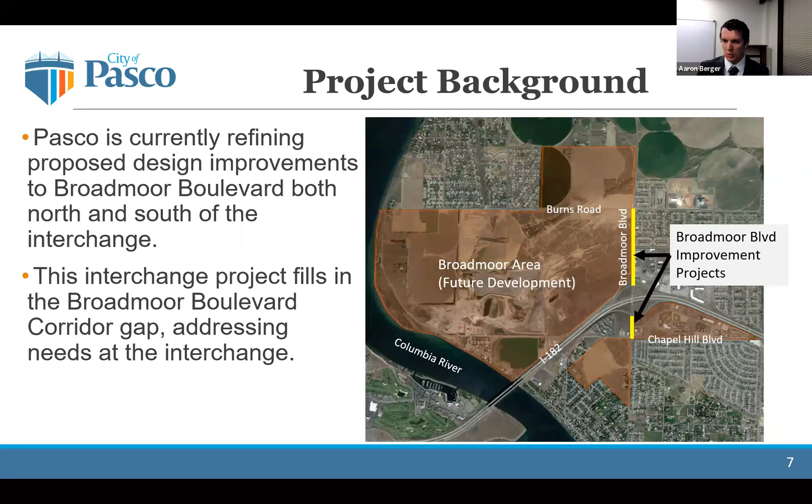As we talked about last time, there are three key categories of concern we've noticed at this interchange, based both on feedback from the public and analysis from our technical team and field observations. The first category is motor vehicle safety. We've seen a history of crashes on I-182 near the eastbound exit ramp to Broadmoor, and also high crash incidents on Broadmoor Boulevard through the interchange.

From a traffic congestion standpoint, our second key issue, we've seen problems with queuing on the eastbound off-ramp and also slowing on I-182 approaching the off-ramp. While those two issues are related, they also have different causes from time to time - some is just due to so many people trying to exit the freeway, while other parts are due to problems up at the signal.

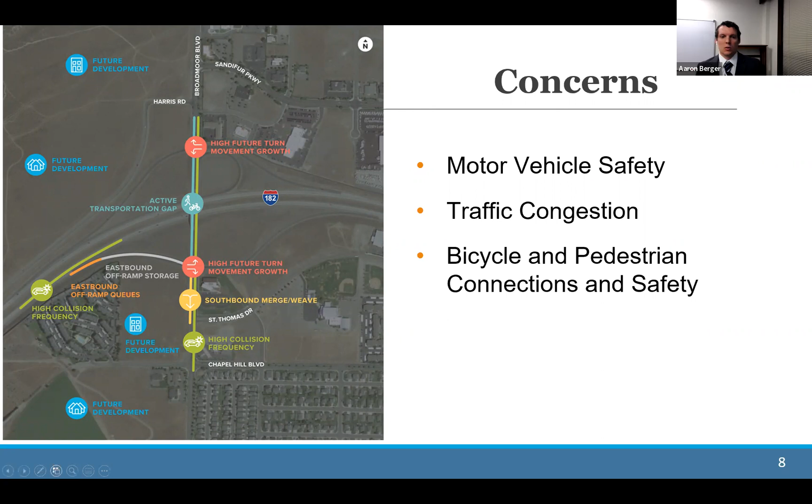The other issue we're seeing is bicycle and pedestrian connectivity and safety throughout the interchange. Right now, there's not much facility for bicycles or pedestrians to get through. We saw that a lot in the public comments - people noted it's really hard to get through this interchange, and they won't let their children walk through it. As somebody who's been out there in the field several times, I can attest it's definitely not a comfortable place to walk through. That's the other key concern we're looking at addressing with this project.

So talking about timeline, we talked about this a little bit last time. We had our first workshop back in December. We talked about the project background and purpose and solicited feedback from the public on the concerns and needs you've seen out there. We also got input on potential alternatives. Taking all that information, we moved into alternatives development, doing work sessions with our technical advisory team, our TAC, towards the end of January into early February. Moving forward from there, we got to where we are today, where we have a set of alternatives that we're advancing into analysis.

And this is an opportunity to present these alternatives that we're moving forward into evaluation to the public and solicit feedback. Get your thoughts on the direction of these alternatives and the things you like and the things you'd like to see enhanced or changed.

Looking further ahead, we're aiming to get WSDOT and FHWA approval of a preferred alternative later in the spring, along with the environmental approval of a preferred alternative, and then begin the design phase of this work. At that point, we will make the final report available to the public, which will include the details of the preferred alternative that is selected, and then move forward into project bid out, depending on the size of the project. We could potentially go to bid sometime in the late fall.

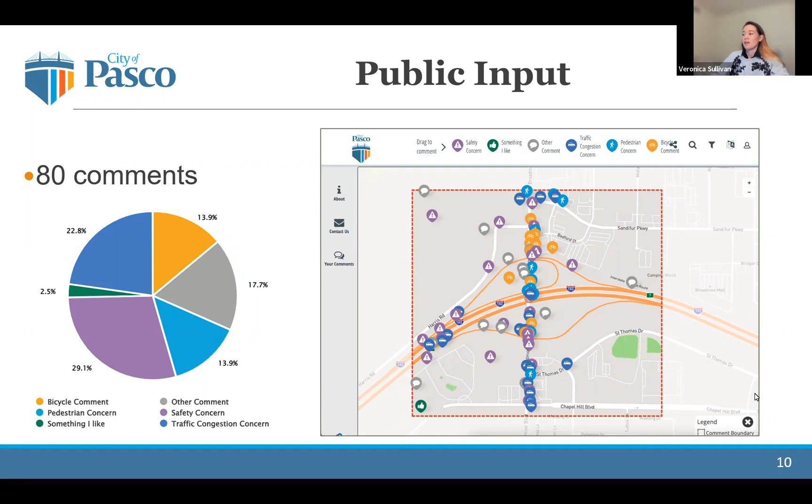As Aaron described, back in December we did our first workshop, and thank you to all the people that provided public input into our social pinpoint site. It was up for 2 months and we received over 80 comments, which is great. There were comments in all variety of areas, bicycle, pedestrian, things they were concerned about, safety or traffic congestion wise. About 29% of the comments were safety concerns, and 14% were bicycle and pedestrian concerns, which is really great news. We used this information to develop some alternatives.

A lot of those comments included different alternatives that were considered for analysis and used for brainstorming purposes. In this case, we were suggested the Diverging Diamond Interchange, the loop ramp, also known as the cloverleaf, and we were given a lot of great ideas for pedestrian alternatives that were also considered in the brainstorming session. We also looked at the extended deceleration lane for the eastbound off-ramp. We looked at a lot of different alternatives, including many provided by the public.

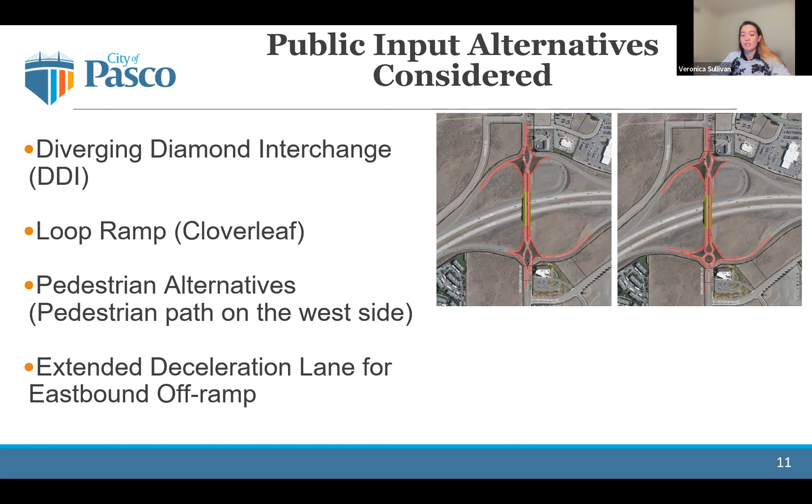We want to say a really great thanks to everyone that provided information and comments on the social pinpoint site. I'll hand it back over to Aaron.

Thank you, Veronica. So I'm going to go over where we're at in this project process. We already went through this at a high level looking at the schedule, but this screening process diagram really shows how we move through this planning process and ultimately get to a preferred solution. In the early stages, when we were brainstorming alternatives, we engaged our advisory group, the technical group, with representatives from the city, from WSDOT, FHWA, from the county, the BFT transit agency, and the BFCOG, the MPO.

We worked with that group to develop and brainstorm alternatives, and we also solicited feedback from you, the public, as Veronica was mentioning. So those alternatives we got through social pinpoint and through discussions at the last work session were also brought into this brainstorming exercise. We started with a wide range of alternatives, all kinds of ideas, but generally aimed towards achieving the project purpose and need, addressing those three key concerns related to safety, motor vehicle congestion, and bicycle and pedestrian connectivity and safety.

Our next step was to refine these alternatives. We grouped them into what we called families of alternatives. There are a lot of different solutions for an interchange like this, and many of those solutions are complementary, meaning you could build both and they wouldn't conflict, since they fix different issues. So it's important that we group things together to make sure we're not eliminating or discouraging alternatives that don't compete with each other.

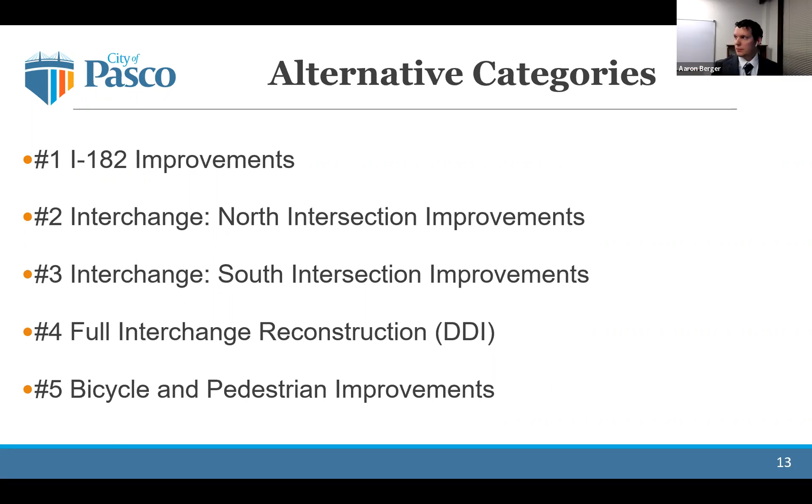We'll start first with our freeway alternatives. As Veronica mentioned earlier, we'll go through these alternatives. I'll present them and give you an overview of the thinking behind them. Then in our Q&A, we'll go through these again and provide you the opportunity to comment.

Focusing first on our freeway alternatives, one alternative we considered is the eastbound loop ramp. There's a little history here. Originally, when this interchange was laid out, it was anticipated that this loop ramp would be added at some time in the future when development and traffic volumes justified it. The purpose of this loop ramp would be to split exit ramp volume between two locations.

Think about all the traffic using the current eastbound exit ramp from I-182, and all the queuing that occurs. A lot of that traffic is making a left turn, and a lot is making a right turn. What this does is keep all the right turn traffic on the existing ramp, while the left turn traffic gets on the loop ramp. This splits the traffic into two different movements, simplifying traffic operations at the eastbound ramp terminal, the south intersection, because we lose our eastbound left turn and replace it with a westbound right turn, which is a much simpler movement to serve from a traffic control perspective.

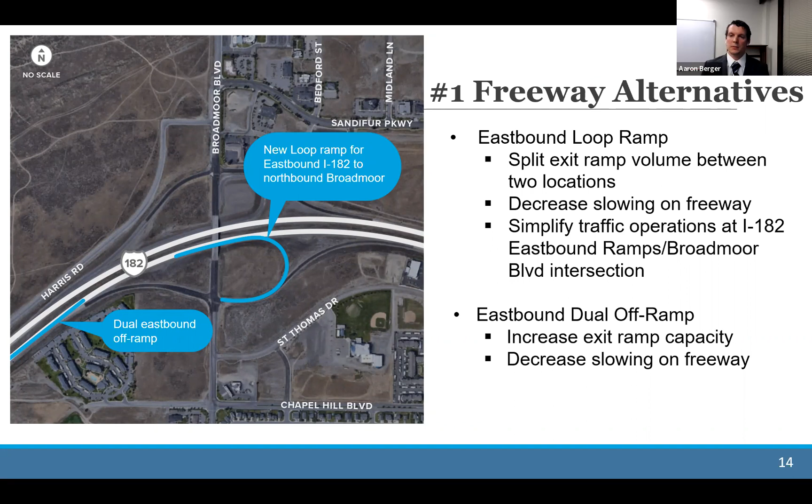Think a little bit about Road 68 right now with the westbound right turn movement at that intersection and how much traffic uses that movement today. As Pasco continues to grow, there will be more demand for that type of movement.

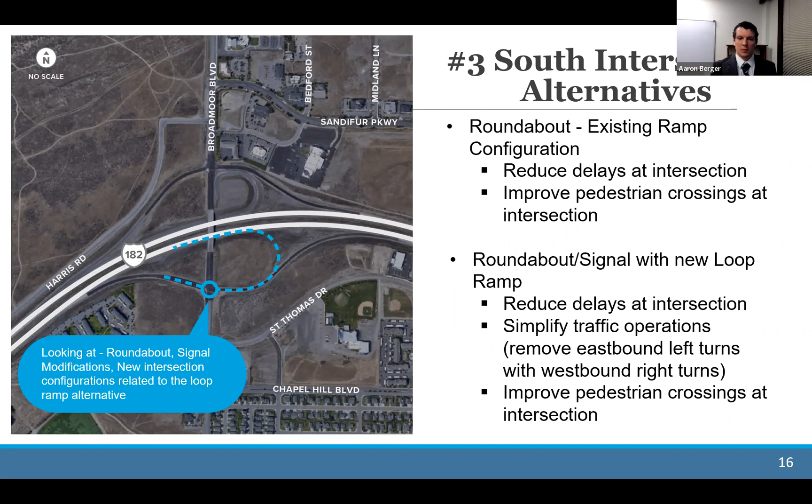And now the fun one. This is a full interchange reconstruction alternative. It's important to point out that there's a lot of potential interchange configurations we could consider, and we did at a high level consider lots of different ones - a single point urban interchange, something with more loop ramps, something with flyovers. But from a feasibility perspective, thinking about the criteria we're working with related to right of way and everything else, and thinking also ahead about what is the best solution long term for this interchange...

We settled on this DDI, and there were comments from the public, also from some of the regional stakeholders in the project with interest in looking at a DDI at this location. So that's what this is, and the version we're looking at is a diverging diamond interchange with roundabouts, which is a little unique from a DDI perspective. DDIs are already a bit of a unique feature, but the overall purpose is to gain some operational, traffic congestion relief from removing left turns and simplifying. I know it doesn't look simpler, but from a traffic management and congestion management perspective, this layout does simplify traffic operations.

So I'm going to run you through how this alternative works from a traffic circulation perspective. It's a little confusing looking at it just as a stick figure. If you're traveling on Broadmoor Boulevard northbound, you can see with the yellow arrows if you want to go on to I-182 eastbound, I-182 westbound, or stay on Broadmoor Boulevard going northbound. This is the unique feature of DDIs where you drive in what we call the contraflow direction across the freeway.

As somebody who's driven through several DDIs and analyzed some in the past, they look a lot more confusing from an aerial view. When you drive them, especially once or twice, it's actually a lot simpler than you'd think. The main reason is there's usually a physical barrier separating the two directions of traffic between the interchange intersections. So that section where you feel like you're driving on the wrong side of the road, you don't actually see the traffic going the other direction - it feels like you're on your own piece of roadway. That's an important thing to remember when you're looking at this.

So here's northbound. Let's take a look at southbound. You can see the same idea circulating through. Notice how we've simplified the conflict points - there's one major conflict in the roundabout, and everything else is really either a free left or a free right turn. Then looking at the ramp terminals, if you're using the eastbound ramp, that's how you process through the interchange, and then looking at the westbound ramp. That's how this configuration would work.

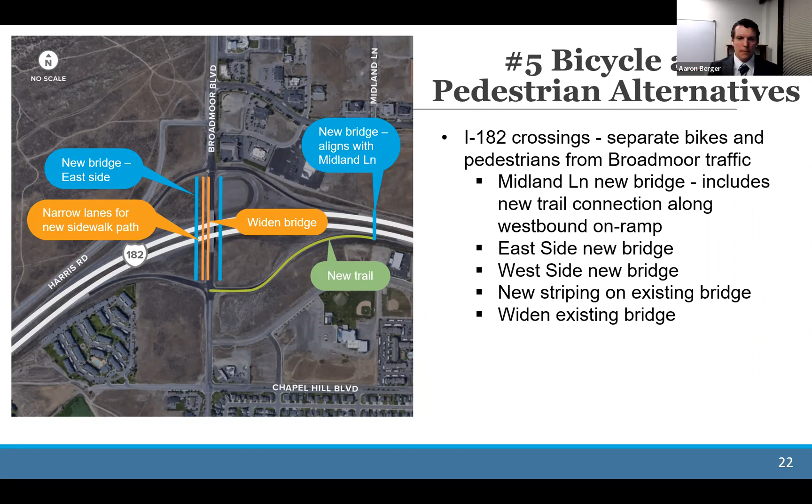Moving on to the on and off ramps, the exit and entrance ramps from 182, we are looking at potential grade separation at these locations for bicycles and pedestrians.

We were considering both over and under crossings, but ultimately based on the grades, the right of way, and also the ADA slopes required to make these work. So think about if you're in a wheelchair and you're trying to get to one of these crossings, we need to maintain a traversable grade. People need to be, it can't be too steep.

So we had to pick out what was the optimal design, whether an undercrossing or an overcrossing, depending on what's going on with the topography out there. Ultimately, we found that an overcrossing actually could make more sense in one portion of the interchange near the westbound off-ramp, and that at all the other locations, undercrossings made more sense.

These are the other alternatives we're considering. I will point out that when we're looking at solutions, these would be coordinated with whatever main bicycle and pedestrian facility we'd select to cross 182.

So for example, we wouldn't put in these crossings on the eastbound on-ramp or the westbound off-ramp if we built a new bridge on the west side of Broadmoor Boulevard. That would obviously be all tied together into one system.

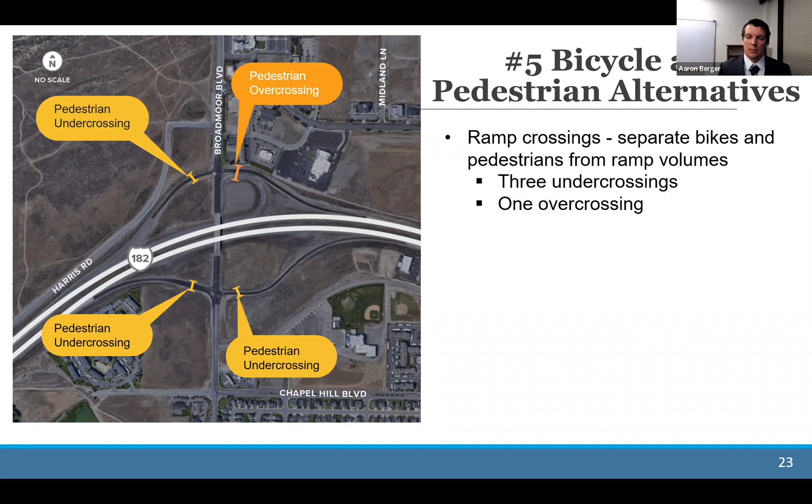Next slide, please. So that wraps up the set of alternatives. I'll point out too that these have been through the first set of feasibility screening.

So we looked at a lot more alternatives, a wide range of considerations, but ultimately focusing on the project purpose and need and looking at solutions that can fix the problems out there today and what we foresee or think are likely for the future, this was what we came out with. I'll hand it back to Kendall.

Thanks so much, Aaron. And just so that people understand the context, because I think that's really important, we have 5 alternatives right now. Is it possible to build all 5, or do we need to make choices about which are the ones that are the most viable that people want to support?

That's a good comment, Kendall. So to be clear, we have 5 categories of alternatives. We have many more than 5 alternatives. When you add them all up, we're more in the range of 20 alternatives.

But many of these alternatives, as you'll see as we go through, could be built at the same time, or at different times, but they don't conflict with each other. For example, improvements to the north intersection of the interchange versus the south intersection of the interchange. It's important to find alternatives that play well together, but they are very independent of each other.

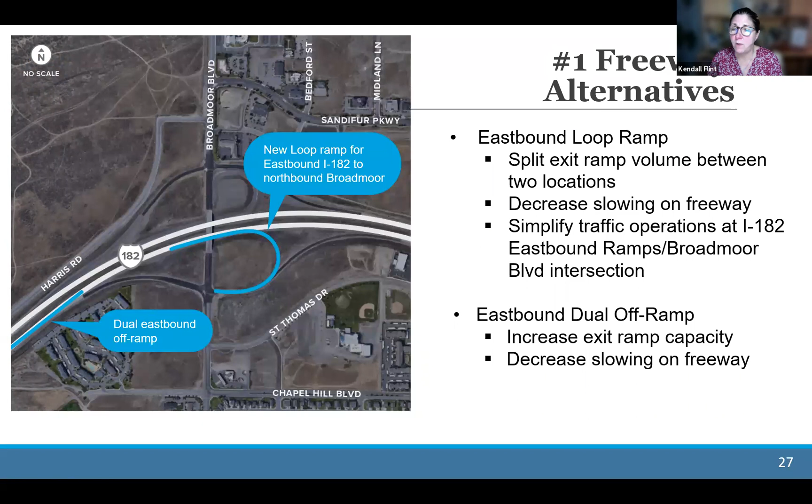I might let Steve take that one, but I'd say at this point we're not looking at vehicle sizes in the designs, but as the project advances into design, we would include a significant design vehicle. Steve, you need to unmute. It's the story of the Zoom, right?

Yeah, you are correct, Aaron. We are planning to accommodate trucks in all of these designs. We recognize that we have a very large agricultural community, especially to the north of us, and so all of the improvements will take into account these large trucks. We will not be closing Broadmoor Boulevard to those trucks.

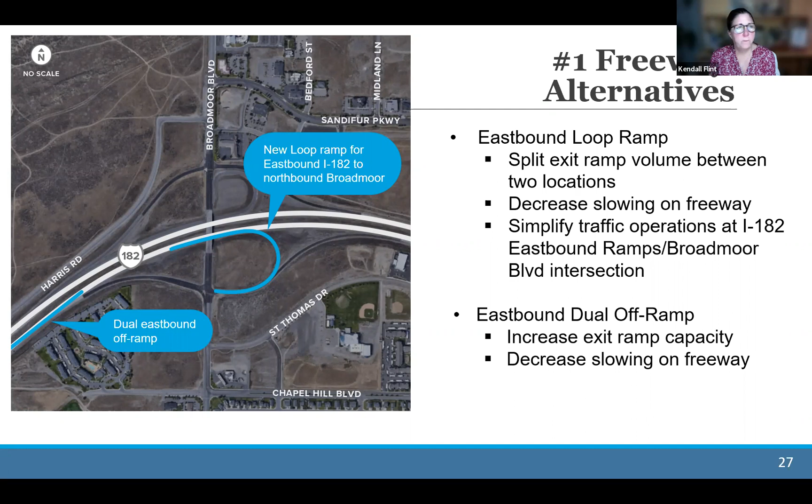Okay, we'll make sure that'll go in the Q&A as well, and we will respond to that. Thank you for that one. Are there any others related to alternative number 1? If not, we'll go ahead and go to alternative 2. So this is the north intersection alternatives, which involve widening the off-ramp to include dual right turn lanes, reducing queuing, and also a roundabout.

I think there's a question here, just to throw this in, from Thomas. It said, why are roundabouts thought to be safer for pedestrians and cyclists? Let's start with that question since it relates to this, and then we'll ask folks to raise their hands if they've got questions or comments that relate to alternative number 2.

I think that for roundabouts, there's a lot of research out there, and there's been a lot of studies of before and after. From a bicyclist or pedestrian standpoint at a roundabout, the biggest safety benefit is speed change. Roundabouts are intended to slow drivers down because of the way they're managed, and the geometry is intended to slow vehicles down. That's why even approaching a roundabout, especially the newer ones, there's typically a little curve in the road coming in, intended to slow you down before you ever get there, so you can't just blast straight through at 45 miles an hour. That reduction in speed won't eliminate crashes, but if vehicles are going 15 to 20 miles an hour versus 45, those conflicts are more avoidable. It's much easier to hit the brakes at that speed, and less severe when they do occur. So that's really the biggest piece of it.

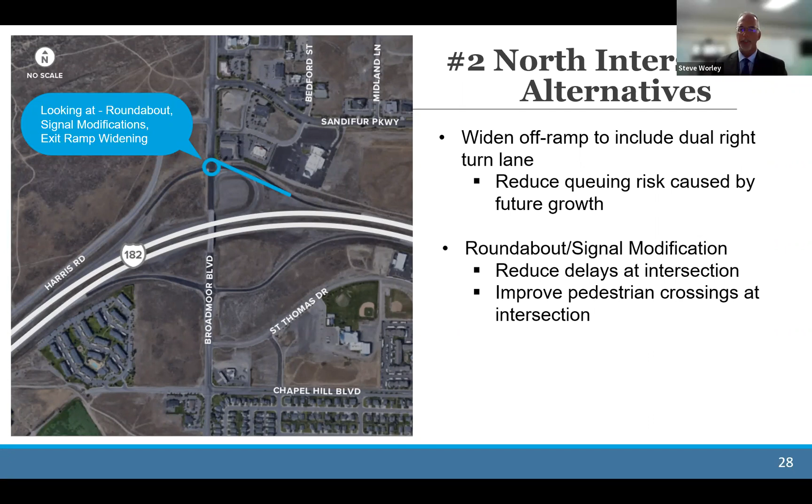Steve, I don't know if you had anything you wanted to add to that, but those are the big ones. Oh, that was a great explanation. Well done, sir. Well done.

All right. Are there any other comments on alternative number 2? Those of you in the chat, we're going to get to those at the very end, so we'll have time. But if there's no other hands raised and it looks like there's not specific to this, let's go to option number 3.

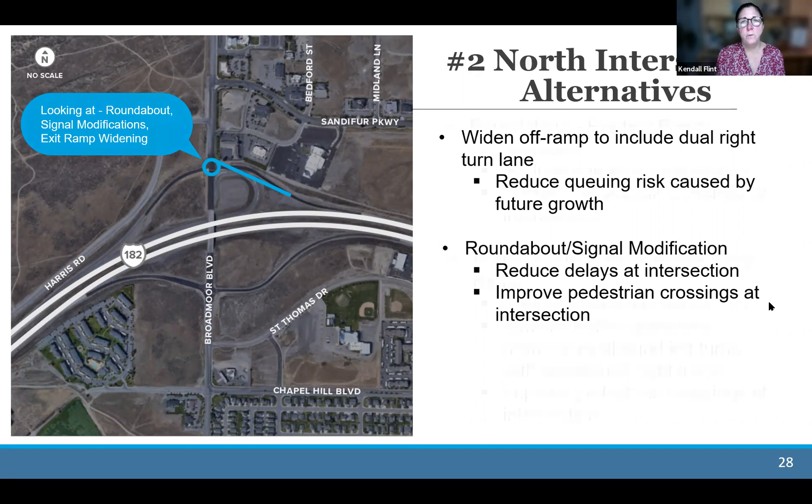This is alternative number 3, south intersection alternatives. Again, we're talking about a roundabout, and I think we just kind of addressed some of those things, and also a roundabout signal with a new loop ramp. So are there any questions or concerns specific to this, number 3, south intersection alternatives?

If so, please raise your hand, or you can also put something in the Q&A or the chat, and we'll be reading those when we get through the 5. From what I'm seeing as people are typing in, there's kind of an overall question, as these are all connected together. So I think our Q&A at the end is probably going to be the most viable on that.

All right, let's go ahead and go to number 4. This, of course, was the full interchange reconstruction. This is removing all left turns, decreasing speeds, and of course requiring the closure of the existing loop ramp and a bridge widening with the new bridge structure. It only works with a single eastbound off ramp, so that is a constraint on that, but it is an alternative that is being considered.

I just noticed a moment ago, Scott Tomerin asked, only option 4 really seems to address the multitude of issues here, but is the DDI, I believe that is a divergent diamond, in use anywhere here? Was that a divergent diamond? I think it was. And specifically, is there also one that includes roundabouts? Perhaps you can address that, Aaron.

In terms of DDIs, I believe there is one, okay this is a bit of a reach, in Lacey, Washington. But don't quote me on that. I know there is one in the state, not with roundabouts though, just with signals. And I know there's a few down here in Oregon, I'm actually in our DKS Portland office. We've got one down in Southern Oregon as well. Different states in the country have a lot of these. In terms of DDIs with roundabouts, there's been, I think, a few, one in Missouri, and then another one that's half signal, half roundabout, so one side is a signal, the other side is a roundabout. So these have begun. I do want to point out that while this alternative we're looking at has roundabouts, if this were to ultimately become the preferred alternative, we would do more evaluation to determine if a signal versus a roundabout makes the most sense at the ramp terminals. We'd look at those individually, the north intersection and the south intersection, roundabout here or signal here.

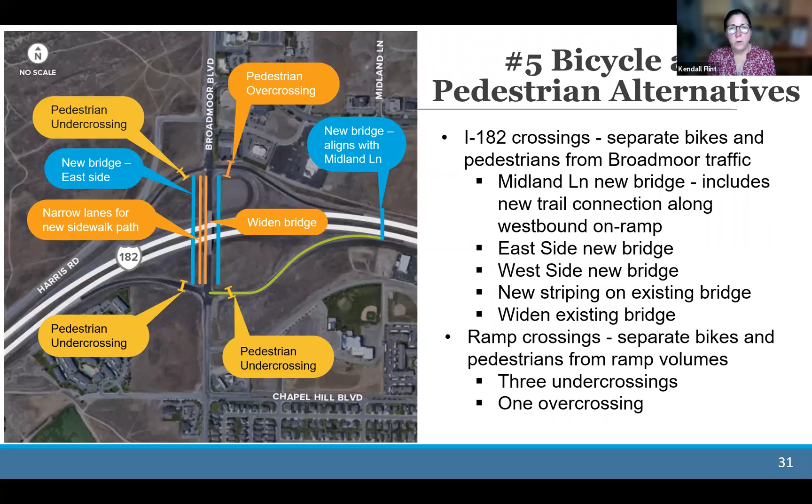There's a map—if you would be so kind, Veronica, to go to that next slide with the survey. I want to make sure people can see that. We have two folks asking questions specific to roundabouts, and the questions relate to whether they are friendly to big rigs and ag trucks moving through, and perhaps you could talk about design and how they would accommodate those trucks.

At this level, we're still not into the details of the design, but we're not planning to close Broadmoor to the trucks that need to use it. In general, with a roundabout, to serve bigger trucks you make the roundabout bigger, the wider that circle is the easier it is for trucks. You also adjust the truck apron, that center portion of the roundabout with different colored pavement, usually pink, which is the area trucks can roll over when making the turn. I've seen roundabouts near Scott Avenue in Woodland with a lot of trucks using the freeway exit ramp, and those big truck roundabouts work pretty effectively with nice flat curves for trucks to roll over on those aprons. So the roundabouts would be designed to accommodate whatever truck uses this corridor.

That would also extend to emergency vehicles. Yes, generally you should be able to keep your emergency vehicle in the travel lanes.

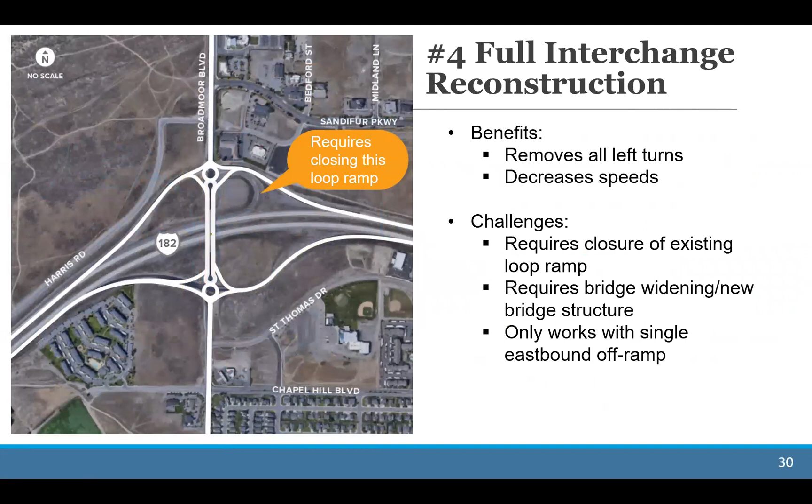I appreciate, I'm not familiar with that configuration of roundabouts, but you say there's one in Lacey, I'll try to get over there and take a look at it. But where they interchange on the number 4 graphic, where it shows our most complicated DDI, the one previous to this one, where traffic crosses at each section, who's got the right of way? I understand how roundabouts work, but there's still going to be a stop, and I have to wait for you, and you need to wait for me as they're backed up across the bridge. One more forward, Veronica, to number 4.

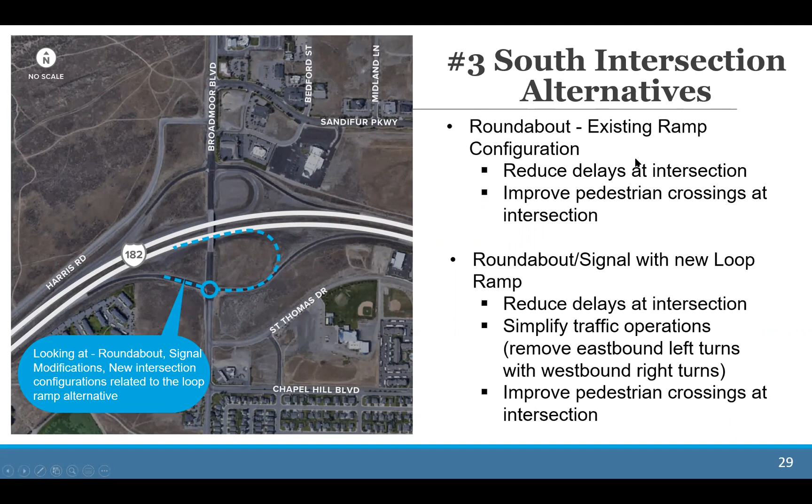If we could go to the animation slides of that one where we show the route through, I can maybe talk to it a little easier.

Let's look at the southbound approach. So the conflict point Steve's talking about is as you're coming southbound, you enter the roundabout, you can make a southbound right turn or continue through. The conflict point is with vehicles coming northbound on the left side of Broadmoor Boulevard. Those vehicles would yield to you at that point. Once you're in a roundabout, you have the right of way, that's how a roundabout works, right? As soon as you're in the roundabout, you have the right of way.

So as a vehicle going southbound on Broadmoor, you would have the right of way, and the northbound vehicles would be the ones that have to yield to you at that point. Then as you get to the south, you will be yielding to vehicles heading northbound. So it's kind of a trade-off, you get to go free once, and then you have to yield. That's really the case for any movement from any direction, you're going to have a location where you have the right of way, and a location where you have to yield.

Okay, thank you. Yeah, that kind of answers your question. Yeah, it does. I just haven't seen it before, so I was a little bit confused, but I appreciate that.

I think the main thrust of this intersection has to be getting traffic off into that south loop, so adding another loop. But another loop exiting to the east is definitely needed.

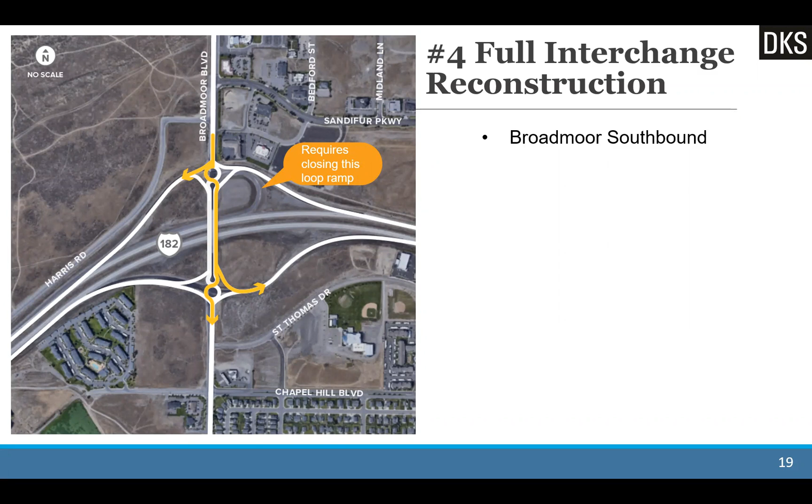How would that be addressed for the future? That's what I mean—something in the design that you could make flexible. You could design both those approaches with the right curvature so they could either be free or yield, and you just put the yield sign on the one that's appropriate.

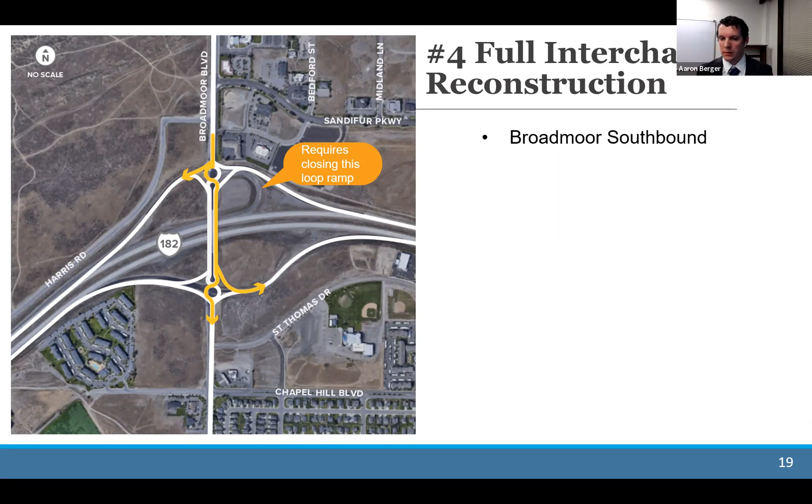Okay, so I just want to reiterate that, you know, good design still—we're still in sort of a design phase, figuring all this out.

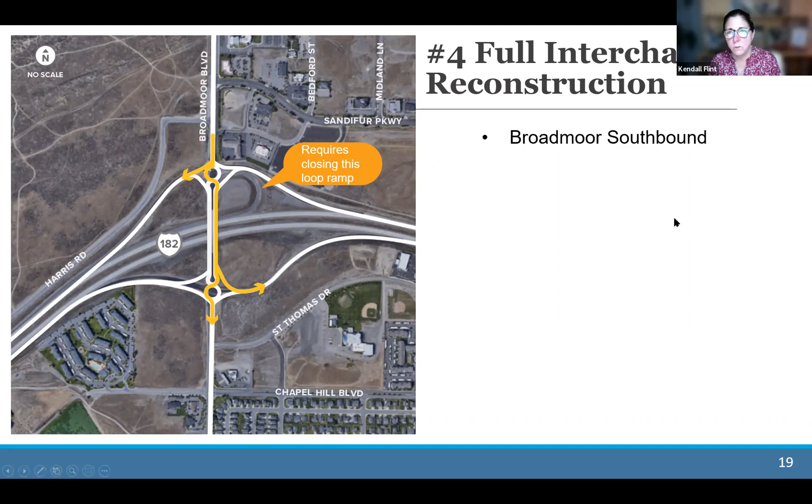There's a couple other questions that relate to timing. Veronica, can you pull up the overall project schedule again? I think these questions relate to the timing of when these particular improvements might actually be built. I think that's a little ahead of our game here right now, because again, we're still looking at the alternatives—they're going to figure out the other things. Aaron, perhaps you can address why that's going to take a little bit longer in order to determine what the actual build is going to be.

Yeah, sorry Kendall, you cut out for like a critical 5 seconds there. No, what I was saying is restating that. No, I think we're all kind of doing that.

Right, well, an important part of all this process—it's a performance criteria, but it's not the only driver.

Scalability is very important because there's a level of feasibility in what can actually be built in this timeline we're looking at right now. So that's going to be something taken into consideration when we're scoring these alternatives.